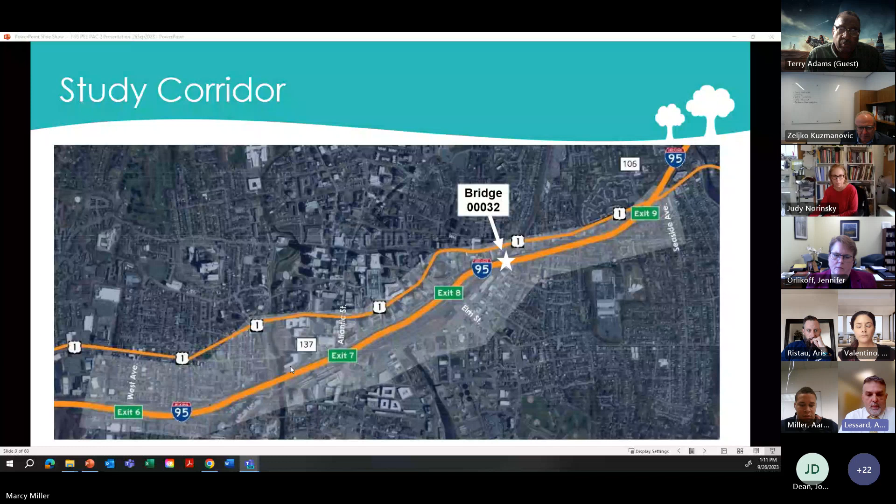You may or may not be aware, this project really started off as looking at Bridge 32, which is I-95 over Metro North and Myrtle, and it kind of expanded from there. So it made sense to start from the bridge perspective to see what's going on with the bridges within that corridor. But first we want to quickly go over some terminology with the bridges, just so everybody's on the same page.

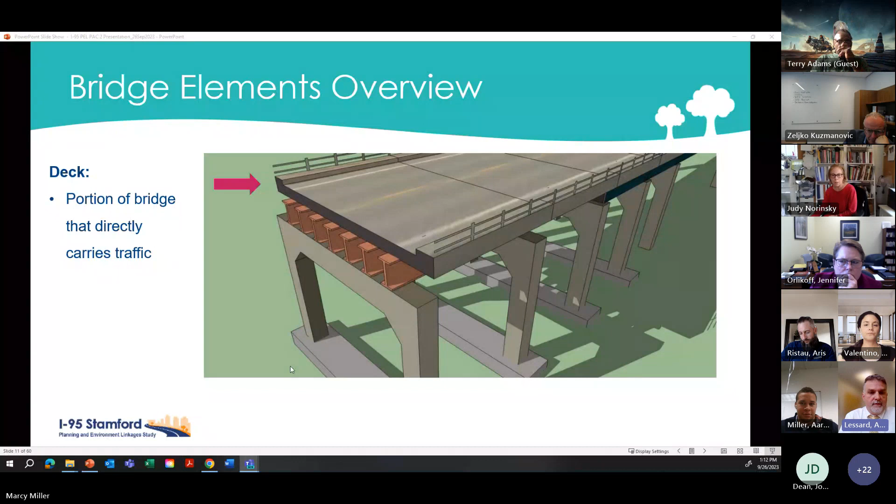What you see here is a schematic of a typical bridge. The first thing is the deck, that's the part of the bridge you're driving on. Typically it's made of reinforced concrete, and that's the top part of the structure. The deck sits on top of what's called the superstructure.

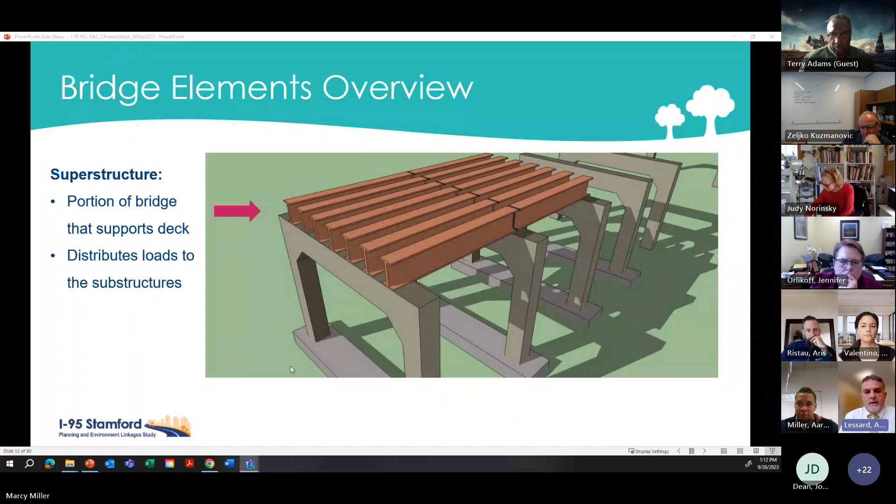This is typically, at least around here, built of steel, pre-stressed concrete, or reinforced concrete. The superstructure spans over to the substructures, which around here are usually concrete piers, concrete abutments. You'll see some columns or wall-type abutments. The superstructure distributes the load from the deck into the superstructure, into the substructure, down into the ground. So that's the general makeup of the bridges we're looking at here.

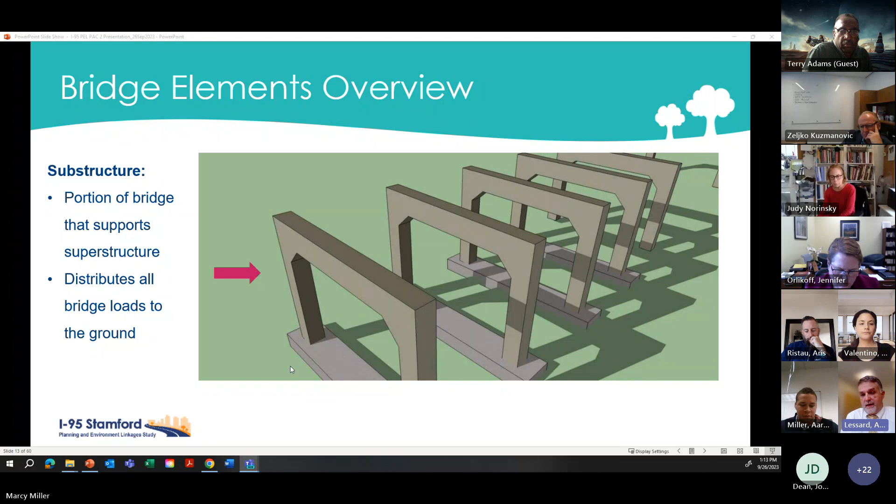Anytime any of those elements falls below the fair rating of 5, it begins to be programmed for repair or replacement — basically needing to take some special attention to that particular bridge. There's also another component of the bridge that's non-structural, which is more about the function of the bridge. That relates to the traffic on the bridge, the curb-to-curb width, and number of lanes. And that's also given a similar rating of 0 to 9.

So the bridges in the study area, and I'll show you the bridges we're looking at in a second, generally range in overall rating from good to poor. There are 2 bridges that are rated poor, and I'll talk about those in a minute. But it's important to note these bridges are safe to drive on — when it gets a rating of poor, it just means the bridge needs a little more attention to make sure we aren't dropping down to the 3, 2, 1, and 0 ratings. The department recognizes that regular maintenance is required on bridges, and sometimes major upgrades are required as well. That's part of the purpose of this needs and deficiencies analysis, to take a look at that.

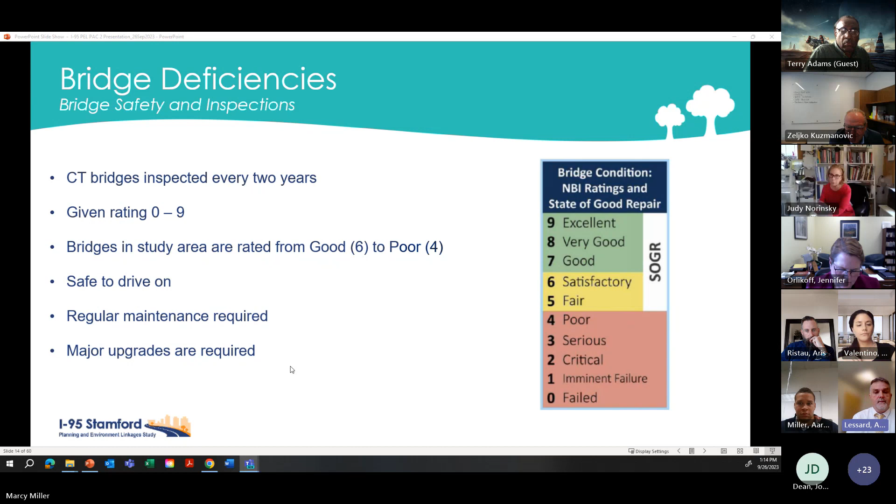So in terms of the study area here, there are a number of bridges throughout this I-95 corridor that either carry I-95 or go over I-95. And I mentioned 2 of the bridges are rated poor.

That's Bridge 32, which is I-95 over Metro North, and Bridge 36, which is Blachley over I-95. On Bridge 32, the deck, the superstructure, and the substructure are currently rated poor, as well as the deck geometry. Bridge 36, Blachley, that's really just a functional issue there, where the deck geometry is rated a 4.

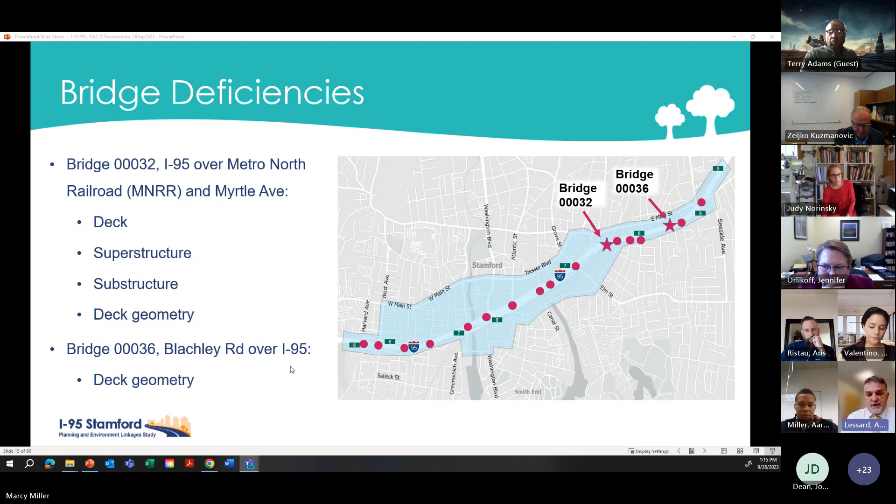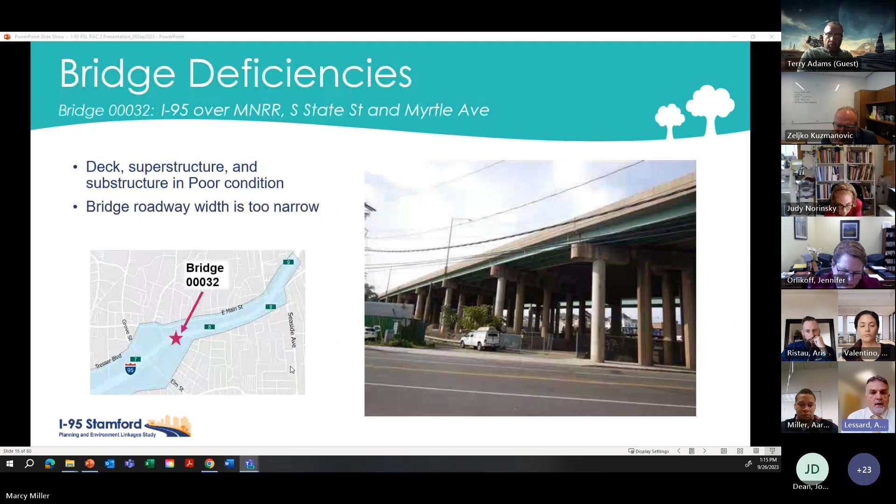Kind of drilling down into some of the actual components. Again, I mentioned Bridge 32 over Metro North, the conditions that are in poor condition there. These are just some pictures from the most recent inspection report. Knowing that this bridge has been under construction, or there has been a repair project ongoing for the past year or so, those repair projects are addressing issues as they come up. But because of the age of the bridge, this bridge was built in the 50s, they're usually chasing these types of repairs, and at some point it becomes more cost effective than continually patching and doing repairs like this, to actually come in and do a more wholesale rehabilitation.

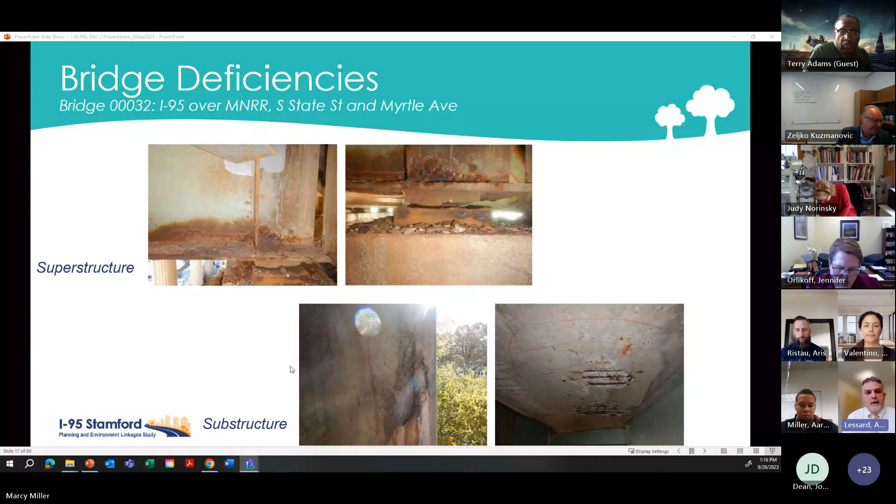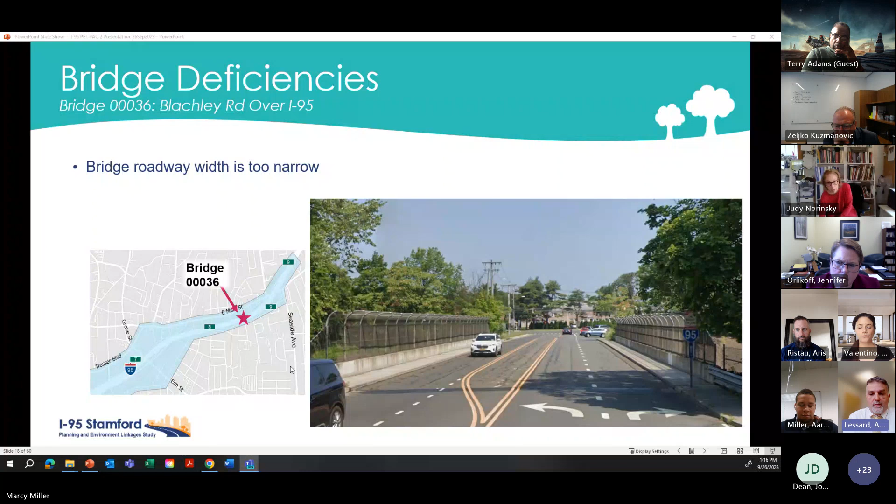So actually we can stop there for a second if anybody has any questions about the bridges before I move on to the roadway geometry itself.

Okay, I don't see anyone that's raised their hand, so maybe we just move on, Andy? Yep, we'll keep going here.

So the other component of 95 that we were looking at is the actual geometry of the highway itself as you're driving on it. The highway was designed and built in the 50s to a certain set of design standards. What we did is we took a look at the same alignment with the lens of today's current design standards, and obviously things have changed over time.

So what we wanted to do was identify the issues. If we were to design this new, we want to identify the areas where the main line might be deficient. So we did find a couple areas there. We had some stopping sight distance on the main line and the ramps that was a little bit too short. I'll go through some more examples of these in a minute, but I just want to give you a list first here: stopping sight distance on the main line and the ramps.

There's some insufficient accel and deceleration lane lengths at the exits. We have narrow shoulder widths, which I'm sure you're aware of as you're driving through there. Not quite as evident as you're driving on it, but maybe if you're on there in a rainstorm, inadequate cross slope - that's the roadway cross slope. We want to have good cross slope on there to promote drainage of the rainwater as it comes down. And then finally, insufficient horizontal curve length - you've got some tight curves through the corridor there.

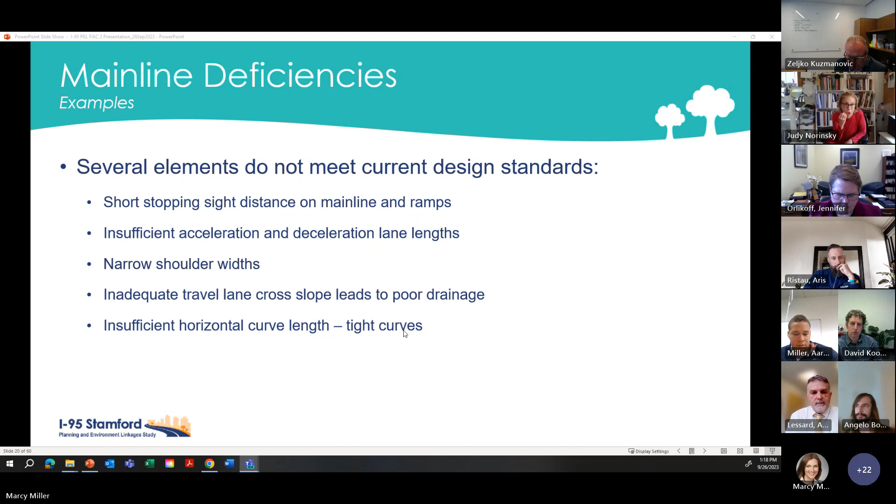So in terms of stopping sight distance, this is a picture. You're driving on 95 southbound in the passing lane. You can see you have the median there, you've got the curve there. Basically, given the design speeds and what you can actually see with your eye, kind of a straight shot, there isn't an adequate distance there for you to pick up a hazard on a roadway, react to it, and hit your brakes and come to a stop. So that's identified as your stopping sight distance.

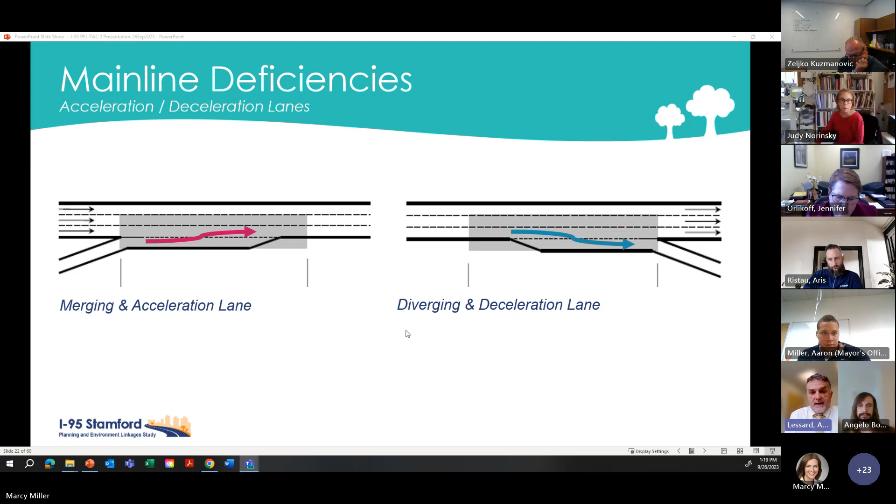When it comes to merging acceleration and diverging deceleration lanes, this graphic shows what I'm talking about. On the left, you have the merging and acceleration lane, where you're trying to get onto the highway, get your car up to speed, and get into the lane before the merging lane ends. Similarly, with the diverging and deceleration lane, you want to get your car off the highway and slow down in enough time to get off the ramp and come to the stop sign, stoplight, or whatever feature is at the end of the ramp.

In terms of this corridor, there are two locations, both related to exit 9. One is the on-ramp from Route 1, which has an insufficient acceleration length. The other is the off-ramp at exit 9, getting off to Seaside Ave, which has insufficient deceleration length.

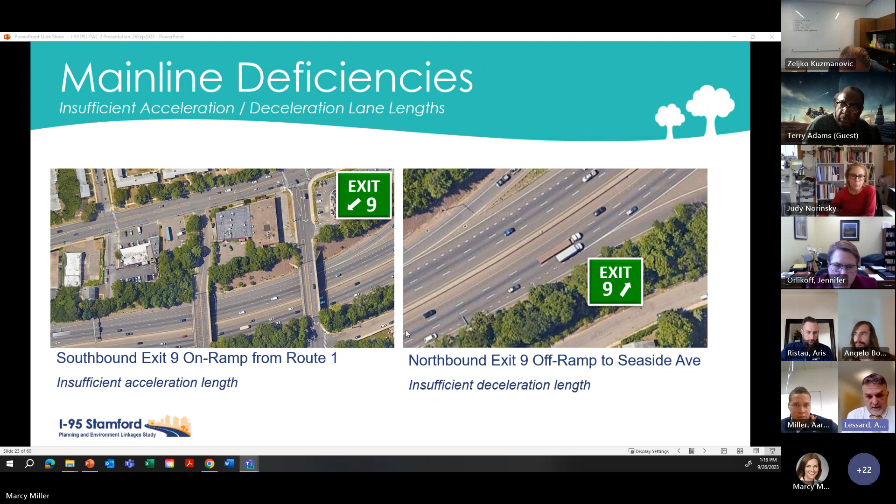If you're driving through the corridor, you know it has very narrow shoulders, particularly as you get to Bridge 32 over Metro North, especially at the median. Current standards call for at least a 10-foot shoulder there. So obviously you don't have 10 feet, you have maybe 2 feet at times. That's a deficiency that was noted as well.

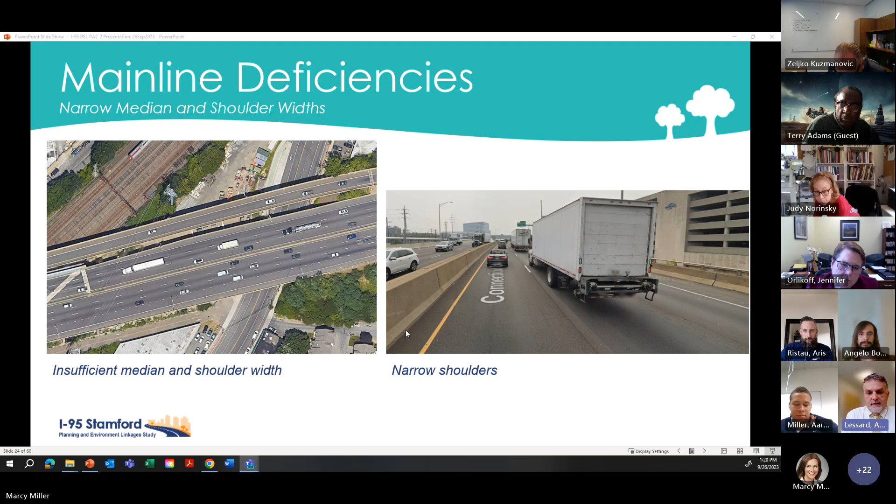All of those geometric features really have an effect on how traffic flows through the corridor. Emily Valentino will talk a little bit about the deficiencies there.

Thank you, Andy. Along with the physical deficiencies Andy just talked about, let's jump into operational deficiencies as it relates to traffic. Before I begin, I'll preface by saying at the last PAC meeting, we heard from this group that you wanted a deeper dive into the data, so we're going to do that today. For about the next 10 minutes or so, I'll discuss deficiencies as they relate to traffic on the main line and then on the local roads. I'll give pauses at key moments for questions or clarifications, but at any time, if you have a question, raise your hand or pop it into the chat. I'd love for this to be an interactive discussion.

All right, so travel time. When we drive on the corridor in non-congested, free flow conditions, it takes about 4 minutes to go 3.2 miles from interchange 6 to 9, in both directions. During the peak hour, both morning and evening, that increases to 16 minutes in the southbound direction in the morning and 10 minutes in the northbound direction in the evening. So speeds drop to about 12 to 19 miles per hour on average.

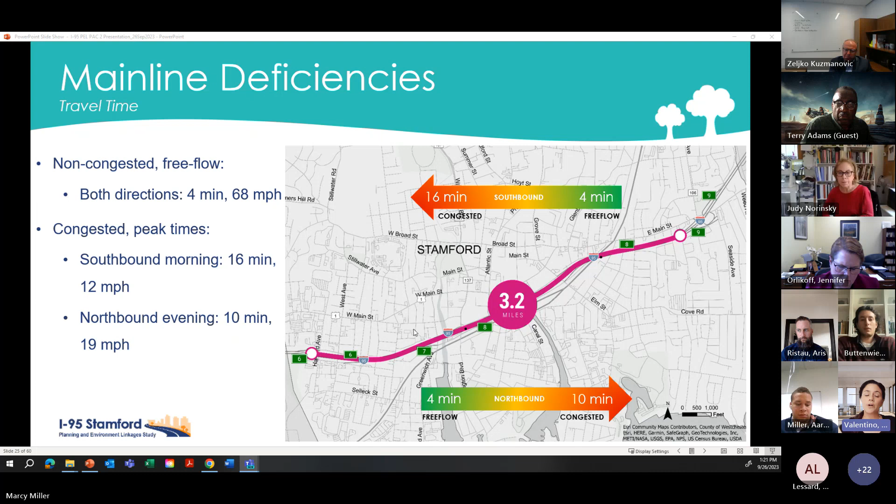We took our existing traffic data and put it into a traffic model. We analyzed the data, and the model ranks the roadway using something called level of service, or LOS, ranked from A through F. LOS A, B, C, and D are all considered acceptable, with no delays or moderate to minimal delays. When we get into LOS E and F, that's when it starts to fail, which is considered deficient, with significant delays. We see a lot of that during the peak hours.

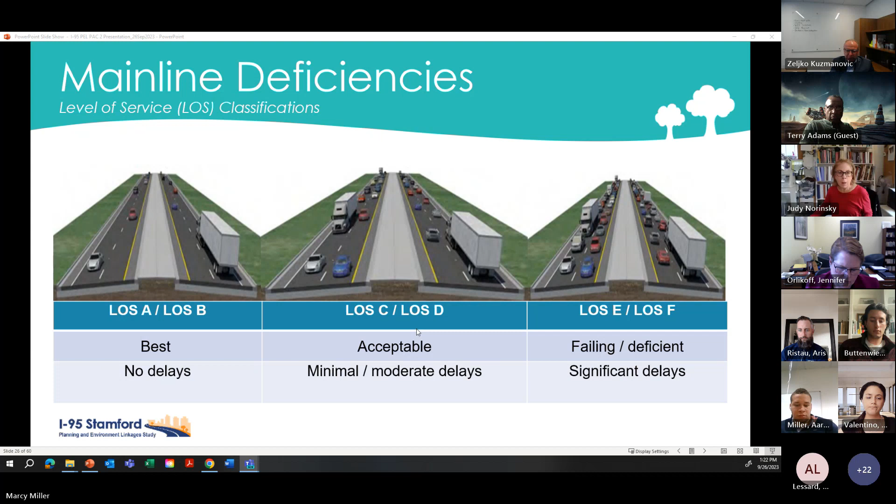Along with just too many vehicles on the roadway, we have high volume weave areas between ramps. I'll get to what that means in a moment. We have closely spaced on-ramps, so a lot is happening in a short distance. And then we have downstream congestion, so if there's traffic ahead of you, you can't go anywhere—you're going to be sitting in congestion just by nature.

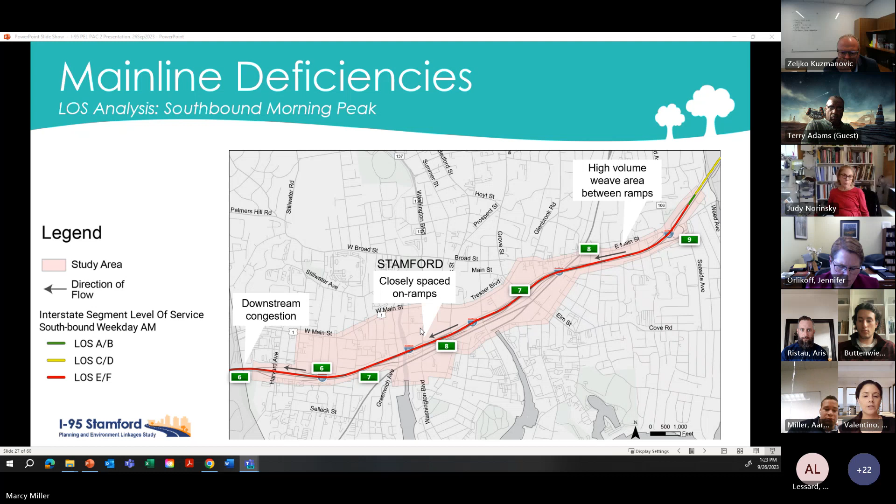So what does a weave area mean? Say you're at point B and you want to get onto the highway. You have to accelerate in your lane—noted by the pink arrow—and then merge into the main line. At the same time, vehicles on the main line have to merge off into the deceleration lane, just as Andy mentioned previously—that's the blue arrow—and that's happening in the same area. So naturally, vehicles have to slow down in order to safely maneuver with the vehicles doing the opposing movement. That's what a weave area is.

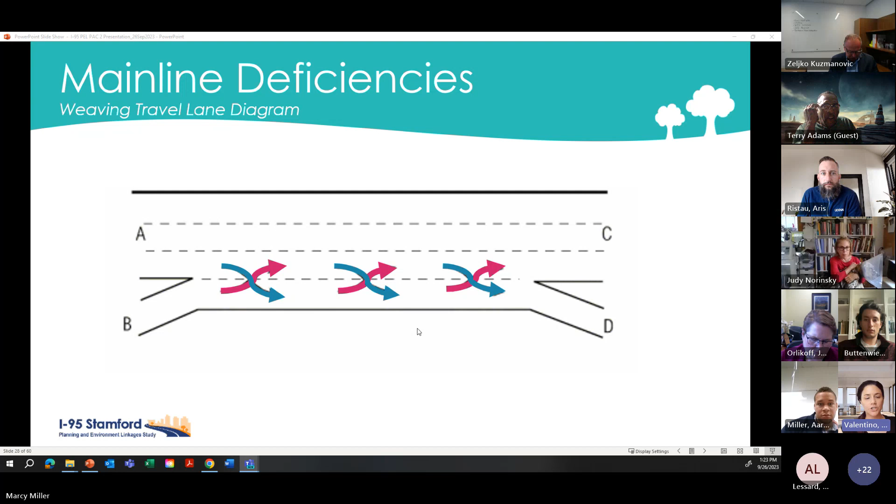And then you put a lot of vehicles in there, that causes more stopping, more brake lights, more congestion. So I'll show an example here in our study area.

Drive with me here. Let's say we are at the 4+ lanes, 3,300 vehicles. We're on the main line, but we want to get off at exit 8. You'll see there are 1,500 vehicles that want to get off at North State Street. That's almost half of the main line volume approaching from exit 9.

So we're driving along the corridor. We have 4 lanes, and 1,500 people will want to get into that outer lane to get off. At the same time, there are 700 vehicles that get on from interchange 9, from Route 1, and they are merging into the main line. So there's a lot happening, a lot of merging at the same time.

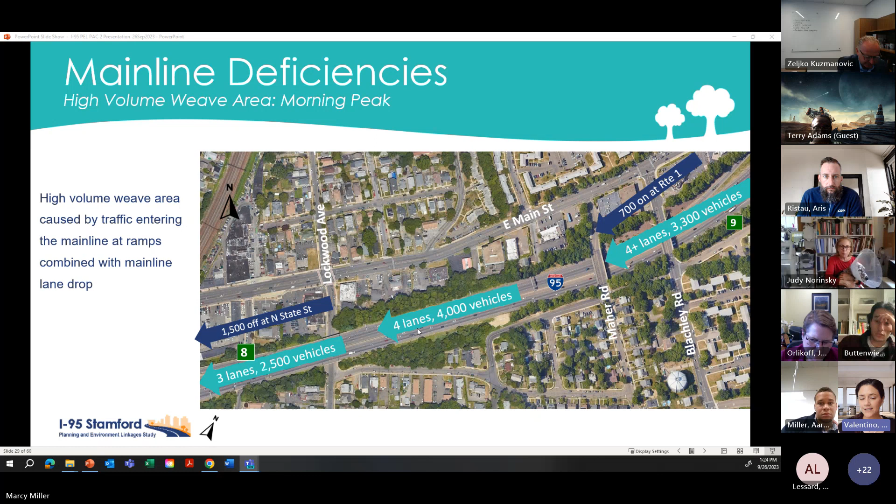Coupled with that, we do have a lane drop. We have 4 lanes between exits 9 and 8, and then it drops to 3 lanes. So there will be even more merging for vehicles that are accidentally in that rightmost lane, but they don't want to exit at 8—they'll have to merge into the main line again.

So that was pretty dense. I'm going to stop there and ask if anybody has any questions or needs any clarifications on what I just discussed. Yes, I see Angelo's hand.

Hi, good afternoon. Angelo from People Friendly Stamford. That auxiliary lane isn't pertaining to this study, correct? Correct. Okay, and that's already been decided on? Yes. Okay, thank you.

Hi, Dave Kooris, I see your hand up. Hey, I'm wondering with this example in particular—I happen to be doing some observations down on North State recently and concluded that a lot of people who would have gotten on at Atlantic are going to North State and getting on at Washington because the ramp itself was too queued up. Are you able through this study—I'm obviously very concerned about the relationship between the highway and the ramps and the local road network—are you able to look at that as well? And will this modeling contemplate what's happening on the local roads because of or in response to highway conditions?

Absolutely, yeah. So this tier of what I'm describing now is mainline, and any changes we make to the mainline, we will be analyzing those impacts on the local road network. That's partially why we included so much of the local roadways, so that we make sure any changes we make don't blow up something half a mile away or closer. So yes, to answer your question.

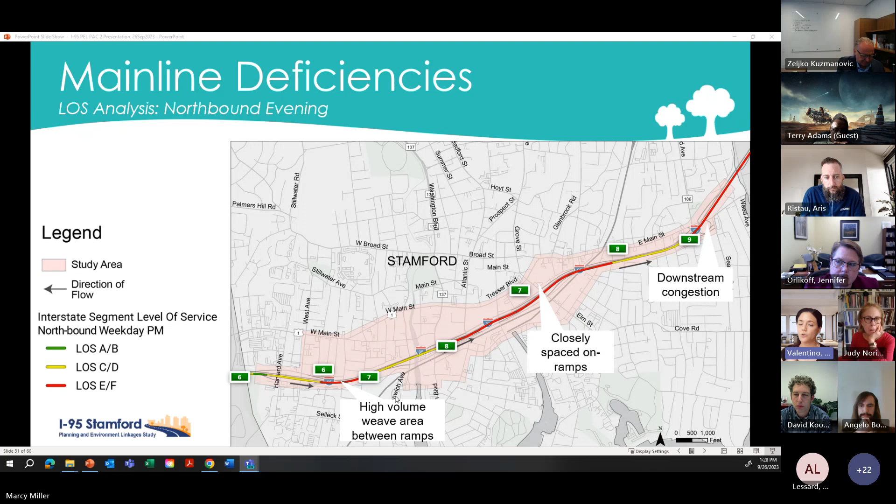So we can look at examples of this in the northbound direction. Similarly, we have 900 vehicles getting onto the main line, and then 500 that are jockeying to get off. So again, short space, a lot of merging, safe maneuvering. There will be a lot of stopping vehicles that can create that congestion.

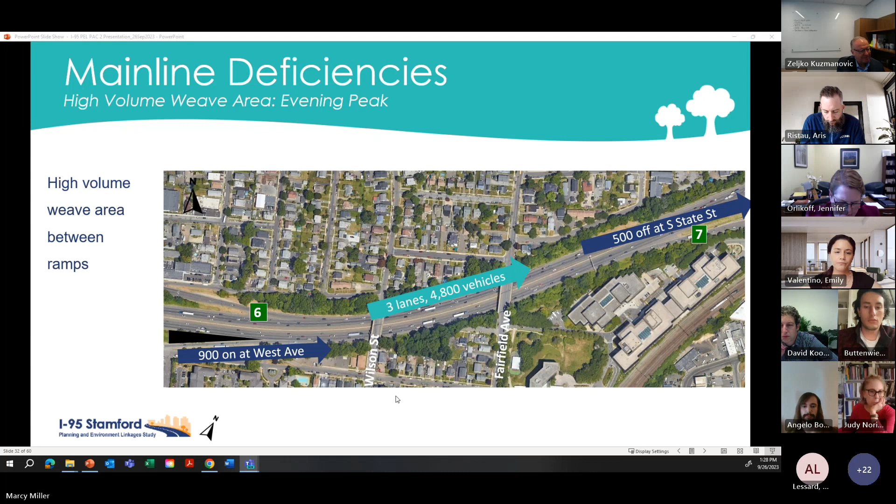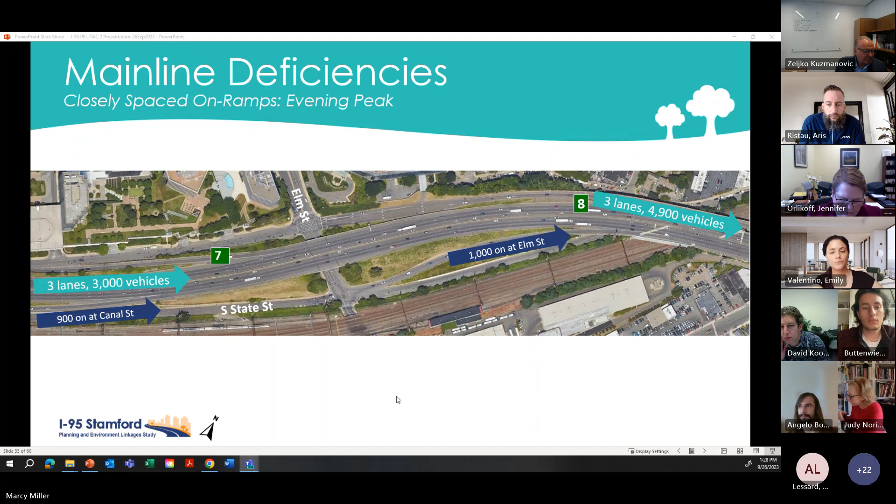We also have closely spaced on-ramps in the northbound direction. So we have 900 vehicles getting on at Canal Street, just to orient ourselves, we're at 7 and 8 here, and 1,000 shortly after getting on from Elm Street. That's 1,900 additional vehicles getting on in a short amount of time, so that will create congestion.

Of course, we did a crash analysis. We discussed this at the last meeting, just wanted to bring it up again because there are deficiencies. We looked at 2016 to 21 data, for the local roads as well. This does not include the most recent crashes that some of you might be aware of, so if you don't see a recent fatality in the data set, don't be alarmed. We are aware of it, but it wasn't in our data set.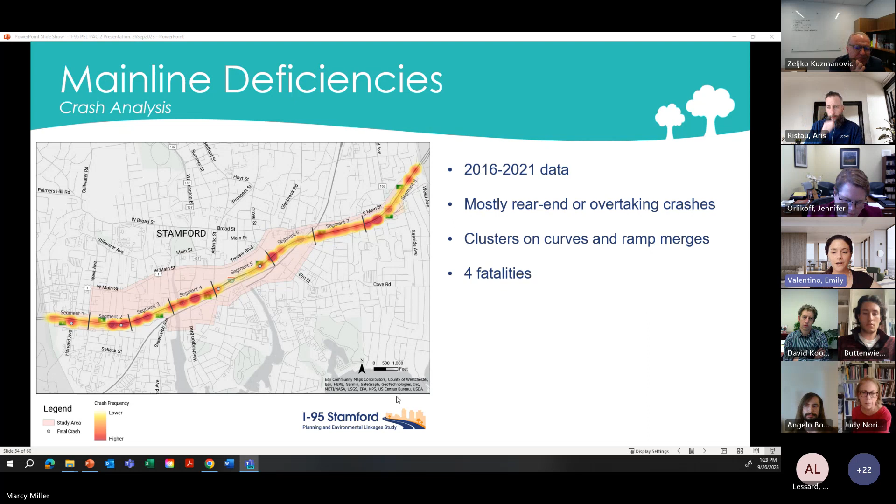On the main line there are mostly rear end and overtaking crashes, and that shows there's congestion that will show a lot of rear end crashes and overtaking crashes, which is when you move along the side of a vehicle. That's where the merging and maneuvering comes in, so there were crashes of that nature. There were clusters along curves and at ramp merges, which there are a lot of in our study area, so that's a natural factor there. There were 4 fatalities on the main line during our study period.

I did just break, but please feel free to chime in if you have any other questions.

So just to recap what we've looked at so far, we looked at bridge deficiencies, Bridge 32, the impetus of our project. If we're going to make any changes on Bridge 32, that will impact the main line, so we're studying the main line as well. We just looked at those deficiencies. And then, to your point too, any changes we make on the main line, we then want to look at how that will impact the local road.

So we'll now go into local road deficiencies, and that is really where this group is going to come in. We want to hear your feedback. We heard it so far at the walkthrough at the last PAC meeting, but nobody knows this area better than you. We want to hear your different points of view because you all look at it from a different lens.

So what are some - let's start with the scope. What are we looking at when we look at the local roadway? First, we will be reviewing the existing conditions for transit service, pedestrian, and bicycle. We also will look at vehicular. We will then identify some potential infrastructure improvements to those services. Safety is a big component here, and there will be a layer of safety on everything that we do, mainline and local roadway.

We will then evaluate the multimodal project impact. So what will those potential improvements, how will they impact the local roadways? And then we will evaluate how any mainline changes will impact the local roadways. So that's the travel demand impacts.

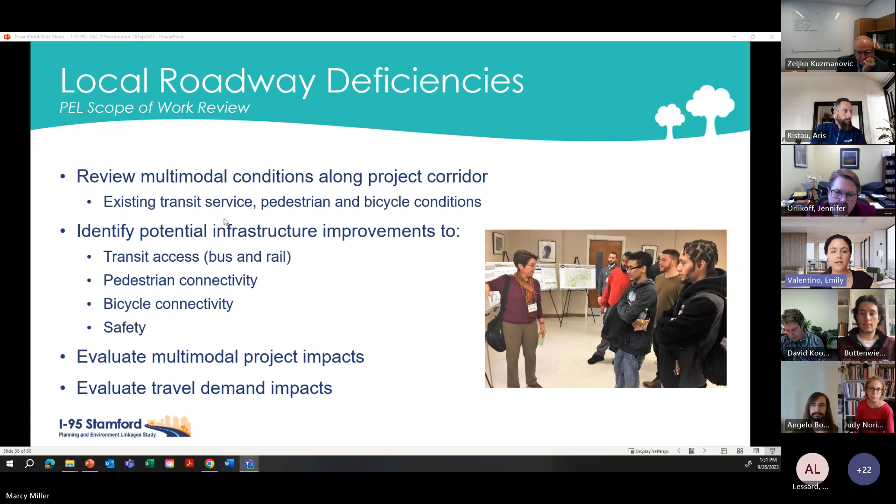All right, so we just wanted to reorient ourselves. These are existing conditions. On the left, you see a map of the existing bicycle and pedestrian facilities. On the right side, we have completed bike and ped facilities, we have planned, and we have under construction, along with paved and other. You will notice there are some planned ped and bike happening in Stamford, but that is going to be incorporated into our study.

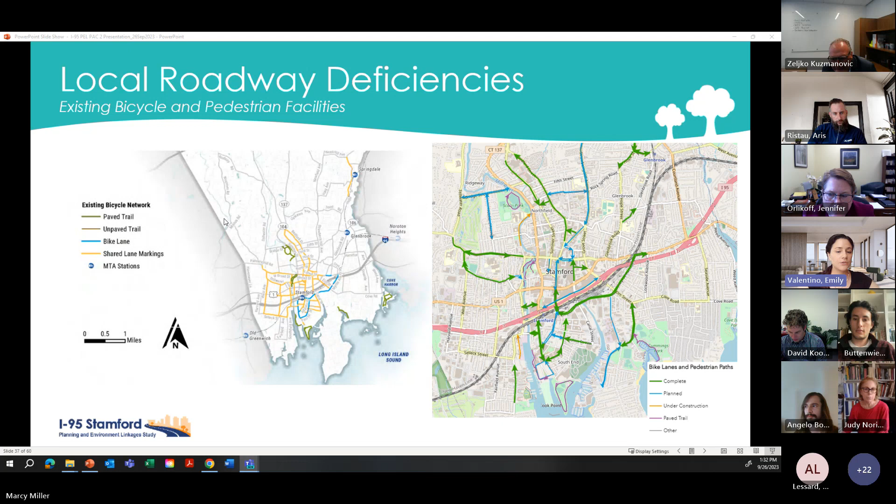Next, we look at bus service. These are existing stations and routes through the city of Stamford and then out into the suburbs, connecting the city to the suburbs.

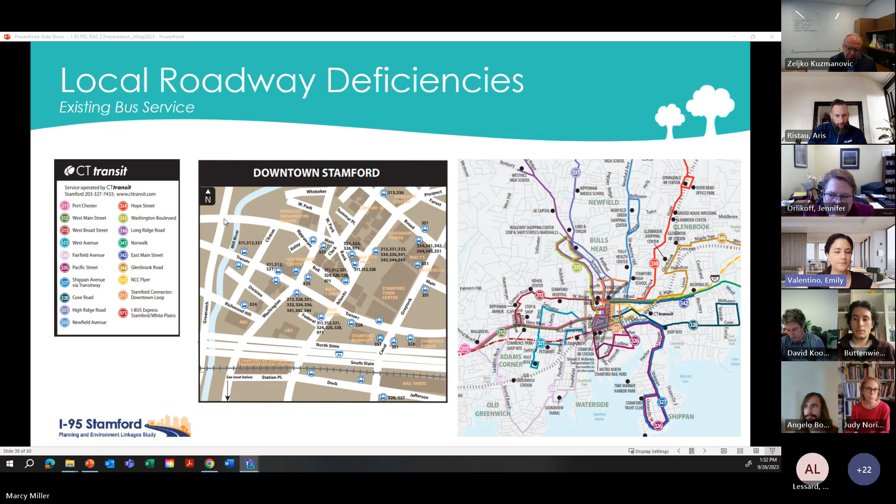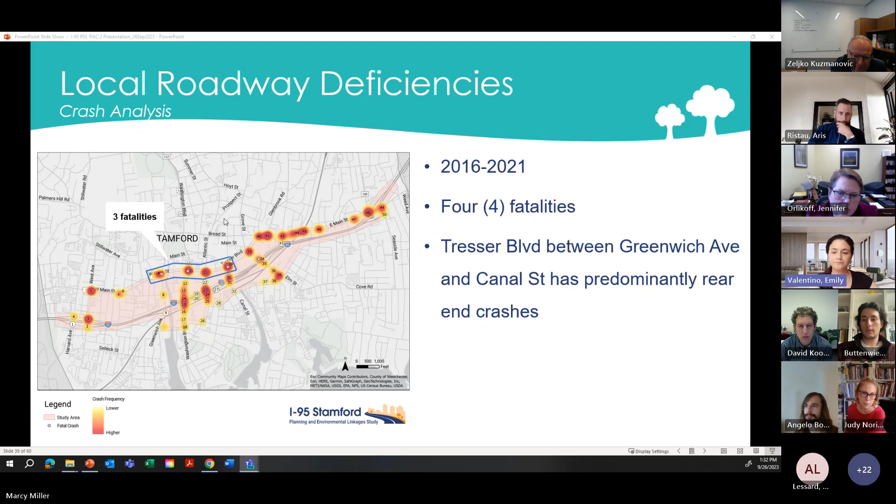We did a crash analysis, of course, on the local roadways as well. Talked about this last time, but there are hotspots, which you can see by the darker red circles. There's hotspots along Tresser Boulevard, and 3 intersections almost in succession here. We have Greenwich Ave, we have Washington Boulevard, and at Canal there were 3 fatalities kind of in a row there on Tresser. 4 total fatalities on the local roadways, and predominantly rear end crashes.

We heard from the group and we know how important pedestrian and bicycle safety is in Stamford, so we wanted to pull that out and take a deeper dive, a more in-depth analysis of specifically ped and bike crashes. We did find that 34 of the 50 intersections that we analyzed have at least one ped or bike crash in the 5-year study period. There were 3 fatalities that were ped or bike, and again, clusters and hotspots along Tresser and West Main.

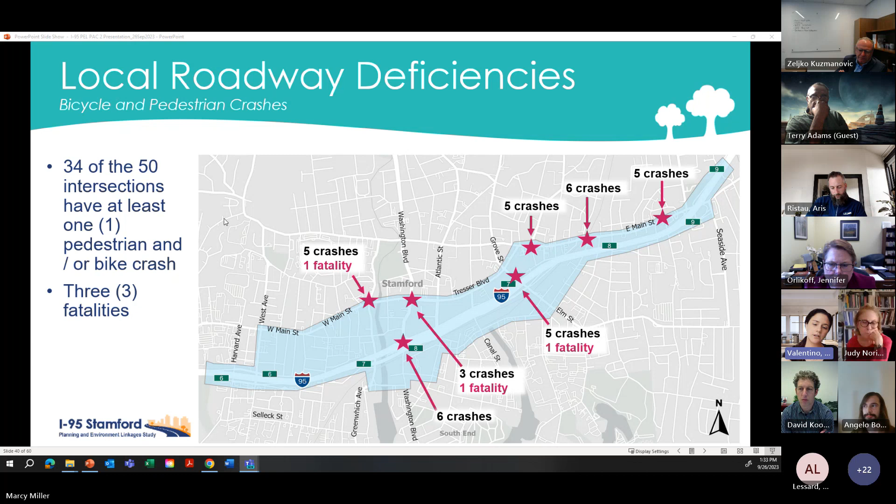I'll pause here. A lot of information being thrown at you. Is there anything that anyone would like to add to this list?

Yes, Dave. The only thing that jumps out to me - I think it's a great, comprehensive list. Just in addition to the lighting under the bridges, there's a lack of buffer in places where there's no on-street parking. Granted, a lot of the time the traffic is slow, but when it's fast, with the narrow sidewalks, particularly under the bridges, you feel pretty vulnerable.

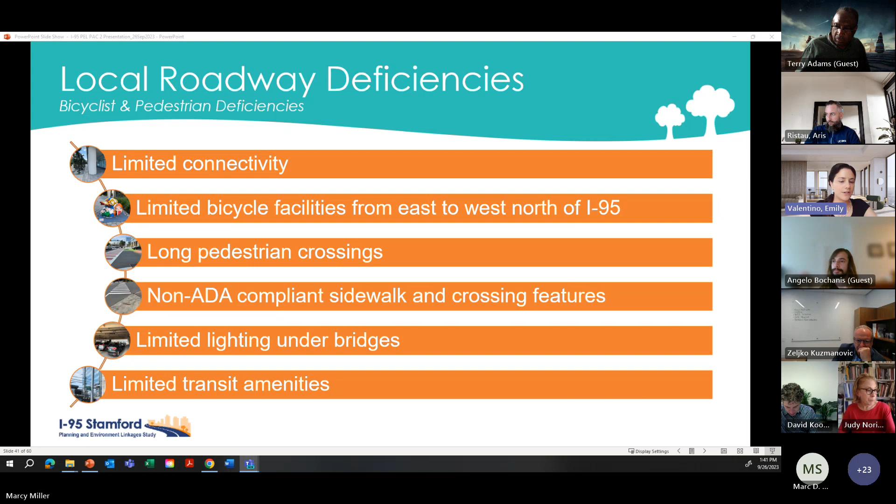All right, I will get moving on here. Some examples, a lot of which we just discussed, but we can get into a little more detail. Here is the bridge that we've discussed. Poor lighting, it's even sunny and it looks dark, so we know that lighting is an issue underneath the I-95 overpass.

We're on Elm, just to orient ourselves, and ahead of us is North State Street. There is also a sharrow, but we'll get to that in a moment. There is a sidewalk, which Dave, you mentioned. It's pretty narrow, and it's only on the left side of the screen. So not great connectivity underneath the bridge, not great lighting, and it is unwelcoming for pedestrians.

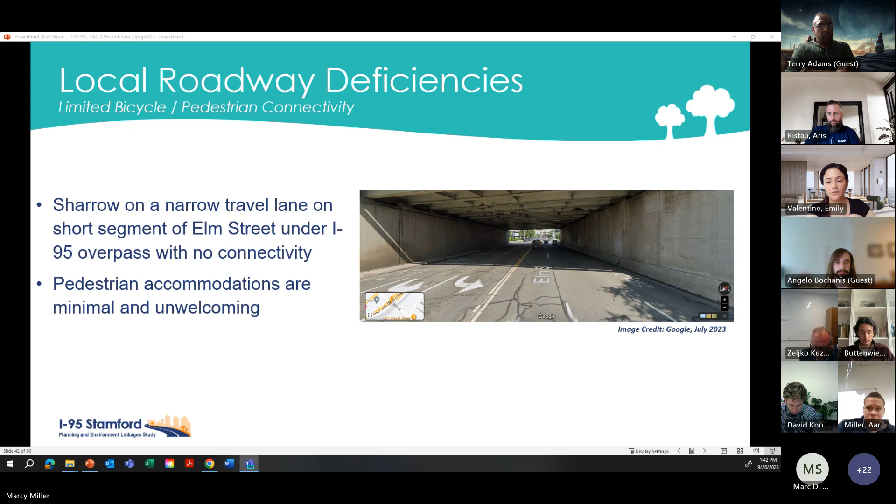Now we'll look at the connectivity piece on the next slide. I can just talk through it. There's a sharrow here, the bike lane, but it goes under the bridge, and there are no connecting bike lanes on either side along Elm. So north of the overpass and south of the overpass, there are no sharrows, so there's only a bike lane just underneath the bridge. That goes with the limited connectivity.

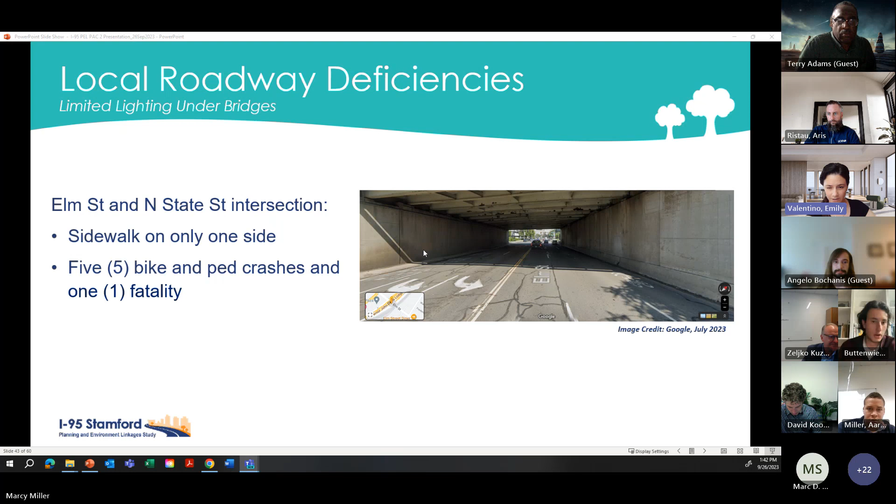And there were 5 bike and pedestrian crashes at that intersection that you'd see if you were to move through the street view here at Elm and North State Street. There were 5 ped and bike crashes and 1 fatality during the study period.

Angelo, I see your hand up.

I'm sorry to bring you back a slide, but I wanted to ask about the roads under the bridge. As you mentioned, there are a lot of pedestrians and bikers using it. Since visibility is an issue, would the study consider protected bike lanes with a physical barrier between cyclists and drivers? This is a wide road with a lot of lanes and very fast moving traffic. I've walked along it plenty of times, and it's definitely unwelcoming. So I wanted to ask if that's a consideration in this study.

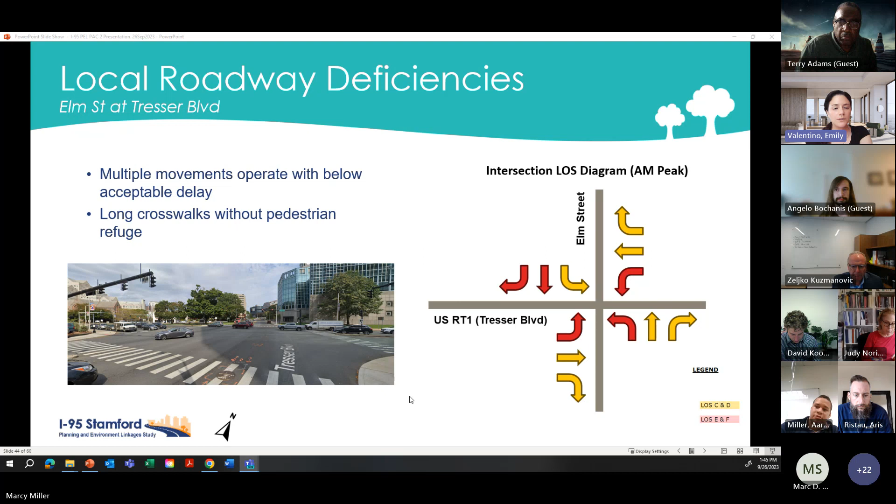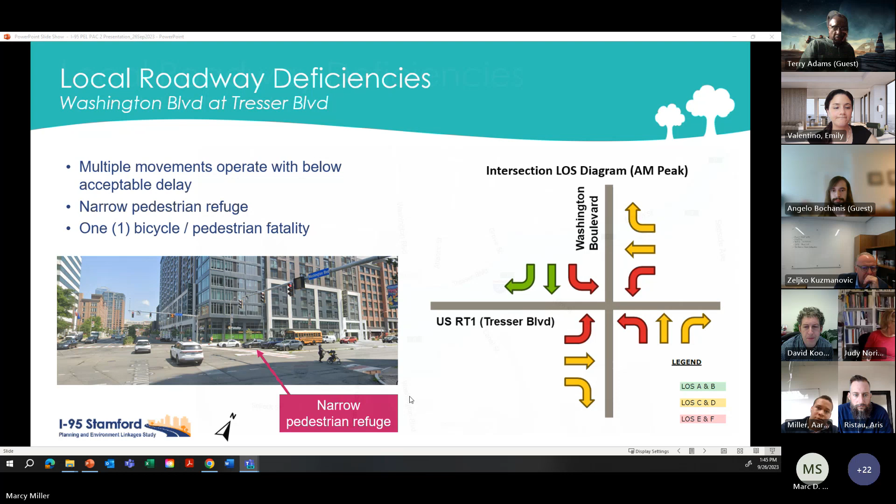Emily, if I can jump in quickly. I know you talked about level of service for highways. I want to talk a little more about the nuances for level of service for local roads, when you factor in pedestrians and other movements you have to deal with on local roads, and those two different levels of service. I think it's important to clarify for everyone.

Yeah, they're very similar. The graphic I showed previously was for a freeway segment, but it is ranked by delay. Intersections do have different thresholds for what would be considered A through F, but the type of delay remains the same. So, minimal to moderate delay is considered acceptable, same for an intersection and a main line. When there are significant delays on an intersection, that would still be considered substandard. So it's different thresholds, but a similar concept.

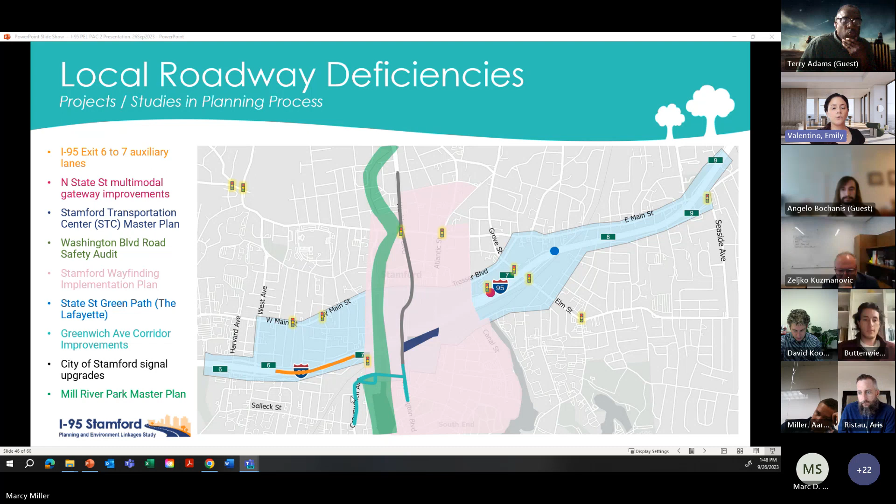So we are looking into these and at what the recommendations are under these studies, and we'll be incorporating those into our future recommendations. That would be our basis before we begin with these improvements already in place.

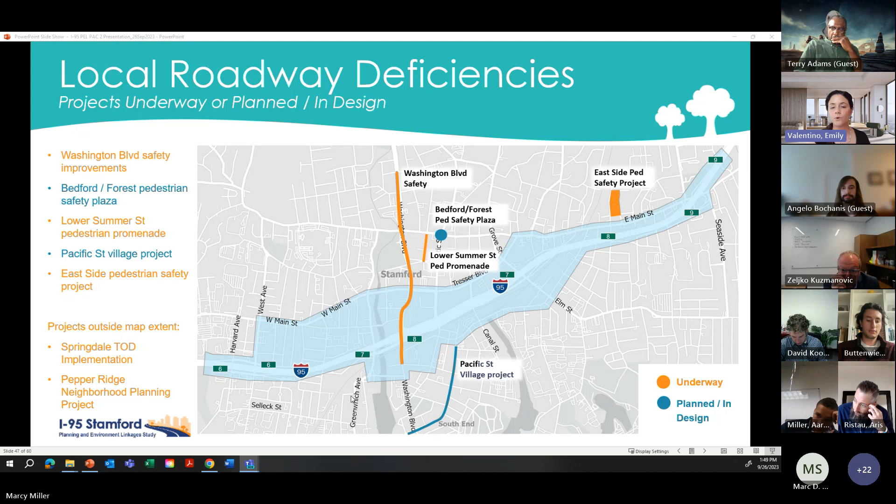Huge emphasis on safety. So I wanted to reiterate that we are coordinating and studying these projects closely, working with the city of Stamford to make sure we always have the most up-to-date list of what will be implemented in Stamford itself.

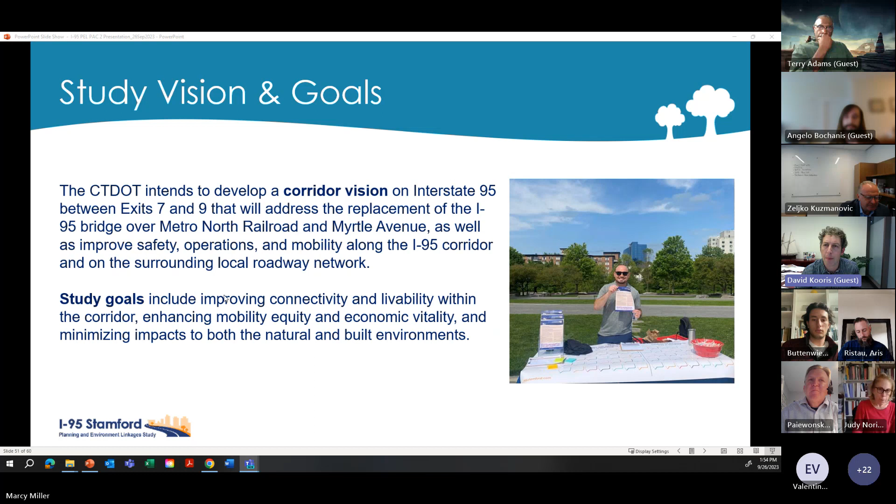Cheers. On the next page, so understanding that this is obviously about 95, the impetus is the bridge replacement. So my guess is we can't go too far into primary purposes related to the local streets. Could there be something though?

I think we would be concerned that alternatives could advance through the study that could theoretically degrade quality or create congestion on local roads, because that's not a primary purpose. I could understand not probably going as far as I might like that enhancing intermodality or multimodality on local streets probably wouldn't be a primary purpose of this project. But could there be something that's a primary purpose that addresses reducing congestion impact on local roads deriving from 95 or something like that?

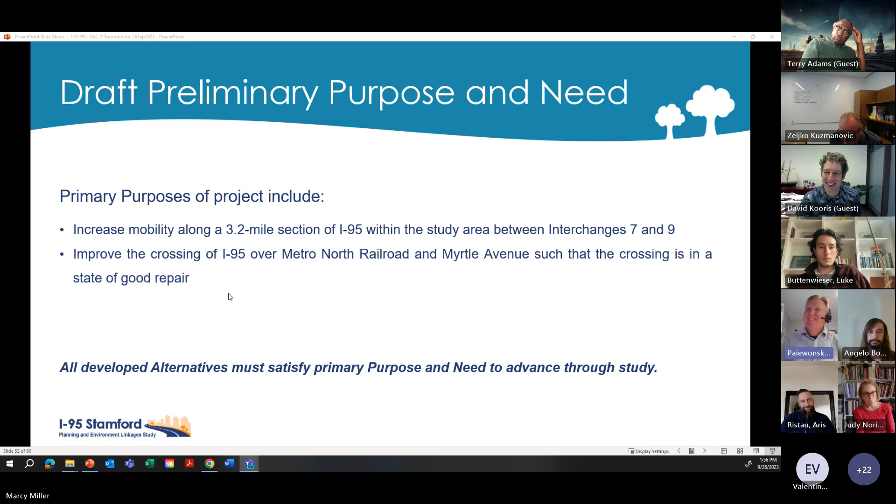Well, you know what? I'm going to address that in the very next slide. Perfect. Okay. Anything else?

In addition to the primary purpose and need, which the selected alternative must satisfy, we have identified three other desirable outcomes of the project that Connecticut DOT understands is very important and will strive to achieve. They include increased mobility for all users underneath I-95 and along the local roadway network immediately adjacent to I-95 in the study area, improved transportation facilities, increased opportunities for transportation choice and ease of use for local communities including traditionally underserved communities, and finally, reducing impact to local and regional community by minimizing construction duration and disruption.

So David, I hope that addresses the points you were making. To a degree, and I don't want to belabor this, but I have no issue with these, and I can totally understand why these would not be primary purpose. I do fear, though, that if there's not something that is a primary purpose around the relationship between 95 and the local streets, that these become much harder.

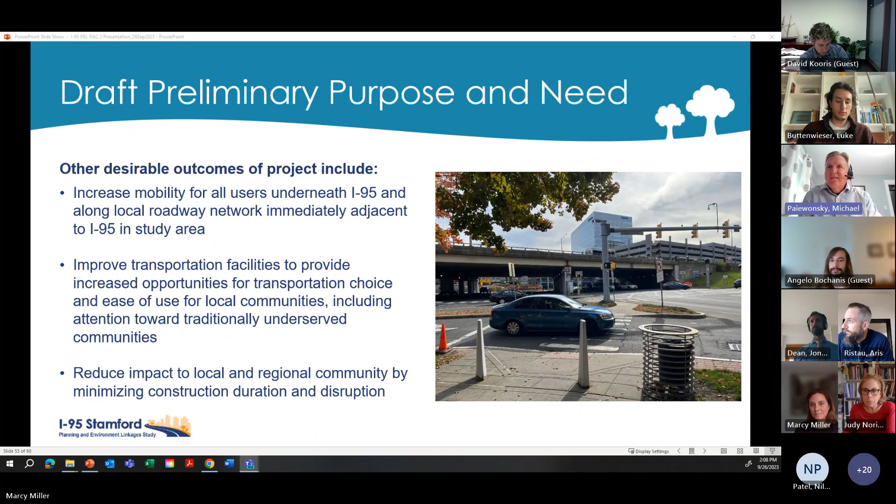What I want to talk to you about today is what we are going to do on our end, internally and with the public, to move forward on this study. So you've heard a lot about existing conditions and some of the deficiencies today, and I hope that answered a lot of your questions. We felt them at the first meeting, so we gave you a deeper dive today.

What we need to work on next is what we call getting into this universe of alternatives. This is the big thing - anything is possible. This is where we put it on the table and look at high level solutions. What happens if we do nothing? What happens if we build a tunnel? What happens if we just continue to reconstruct this bridge and this highway forever?

What will it mean for the city of Stamford and the rest of the traveling public? We start to evaluate that, then move on to a more specific range of alternatives, because some of those things are not going to meet the purpose and need. Some of those things are going to have big red flags.

But the purpose of this study is to weed some of those early things out so we don't have to do design on them much later in the process and drag it out 10, 15 years longer than it has to.